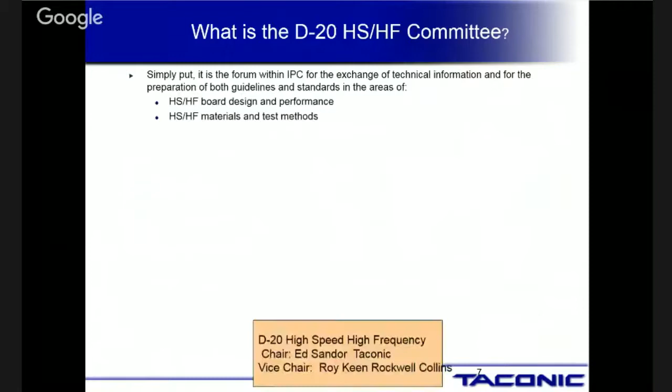And then I also wanted to cover what the IPC is, because it's important. When you're doing your prints and designs, you're always specifying that the board has to be built to IPC 6018. All the drawings have to be to IPC standards. And so the IPC, we write all the standards.

And I'm chairman of the whole high frequency and digital group, which includes all the design guides, material testing, all the bare boards, how you build the boards, all the quality requirements and all the coupons required on the boards, as well as the material specs, and then all the ways to test the boards and test materials.

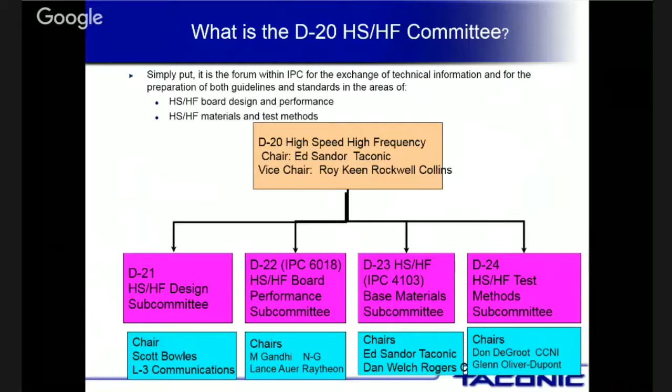And so I have about 13 committees that report to me at IPC, and I'm also on the IPC's Technical Advisory Committee, which dictates the direction of what we're going to do in the industry at the IPC. But you guys use it a lot, whether you know it or not, because it's on every single one of your prints. You probably have 15 notes which specify IPC standards or IPC documents.

So what I did on this is, rather than just talk about what we do at Taconic, I thought I'd maybe try to break down materials. So for example, this says what commercially available resin systems. When you open your computer and there's a printed circuit board in there, what material is being used? Or if you're opening up one of your cabinets, what material is being used on the power amplifier?

And so what I thought I'd do is just give you an idea of all the different materials that are available in the marketplace. I broke them down generically, by electrical properties as well as mechanical properties of those materials. One of the big things that we look for in our industry is the dielectric constant of the material. The dielectric constant really determines how fast the signal is going to propagate on the board, how fast it's going to get from point A to point B. The lower the dielectric constant, the faster the signal will propagate down the trace. So I put these up here: faster signal propagation, lower signal loss.

By picking an impedance that you're going to use on the board, you can determine a 50 ohm line is going to be X mils wide, and you're going to have a nice clean signal. And then by changing the dielectric constant of a board, you can change the size of the board. For example, if you're doing something on FR4, which is epoxy glass, it's got a dielectric constant of about 4.5. Your traces may be probably 25 mils wide. But to get the same electrical performance, you could go to a dielectric constant of 10 and shrink the board down to half the size.

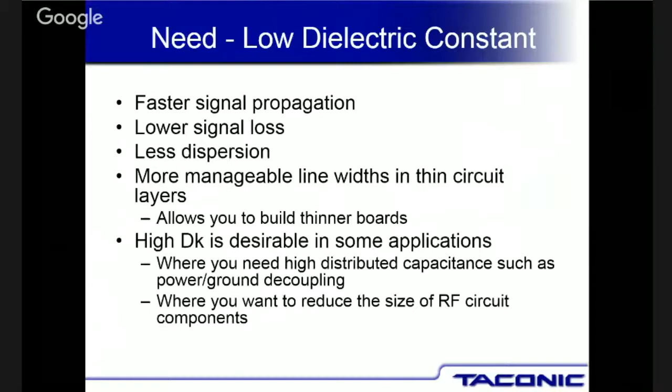And then some people manufacture hydrocarbon ceramics, a completely different resin system, but by sticking different things in there, you get a dielectric constant of 3.4, 3.5, and now people are starting to make higher dielectric constants with the hydrocarbon ceramics. My point is to show that there's a lot of choices an engineer has in picking a material for a particular printed circuit board.

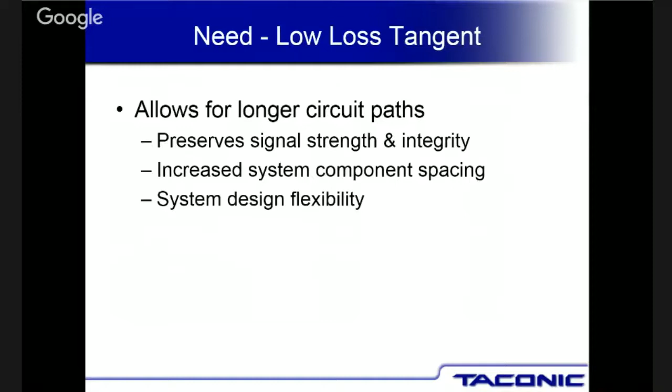And so again, I'll switch over to this and look at these same type of materials. These are ranges, and when you look at the PTFE glass material, it is the best, with a dissipation factor of 0.0009. That means that of the fields going through the material, you're only losing 0.09% of the signal. By the way, where does that go? It generates heat. It's one of the losses that you'll find.

When you start sticking other things into pure Teflon, the losses go up a little bit because you're sticking something else in there. So when you go into a ceramic, the second one down, PTFE ceramic, you can see that the losses go up where you're now losing 0.12% of the fields through the material. Now, if you keep on going, you say, what is FR4? A regular epoxy glass. You go down to the bottom, and there's a couple different grades of FR4, and I'm going to come back to this in a little bit.

But you can look at it and you'll say, damn, 0.025. That means 2.5%, not 0.2, but 2.5% of the fields actually get lost in the material as the signal is going down the trace. So it ends up with a lot of loss, which we all hate in our microwave boards because that contributes to very, very poor board performance. But again, looking at all these different materials, an engineer has a lot of different choices when he's doing a design.

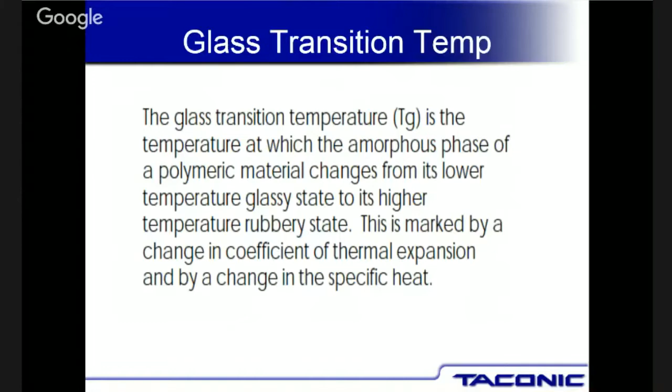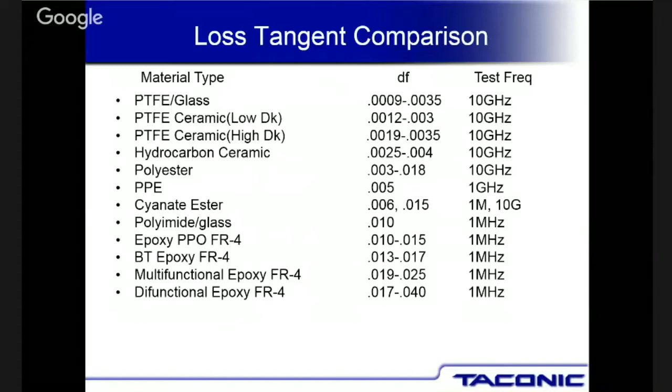So for example, I'll go back to the past slide and say, the bottom two materials, multifunctional epoxy and difunctional epoxy, have different TGs. I'll switch ahead now, and this is glass transition temperatures of different materials.

What does that mean? It used to be you could take that board, put the components on it, run it through an IR reflow, and the board would come out the other end with all the components soldered in place, because you're exposing it to 210 degrees for so many seconds over the IR reflow. With ROHS and lead-free solders, now we're looking at 280 degrees.

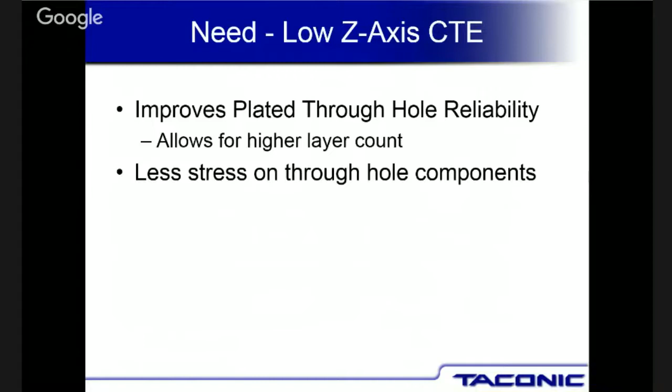With the new lead-free requirements, it's amazing that a lot of people are getting away from the traditional FR4s, the epoxy materials, and a lot of people are going to the BT epoxies, bismaleimide triazines, or a lot more people are going to the polyimide because it will stand up to the lead-free requirements.

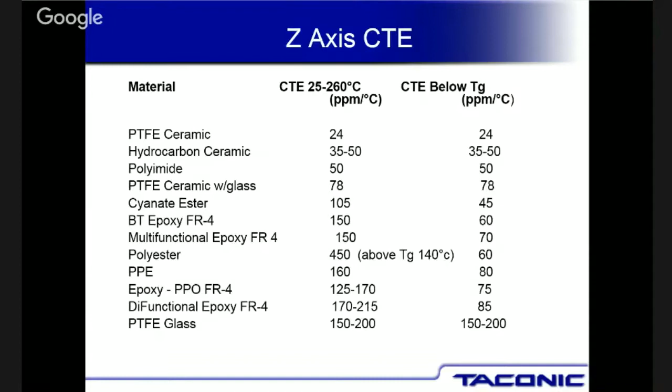Thermal conductivity. What does that give you on a board? Well, the board runs cooler. You get higher packaging density. You can put more components on the board since you can actually run it cooler.

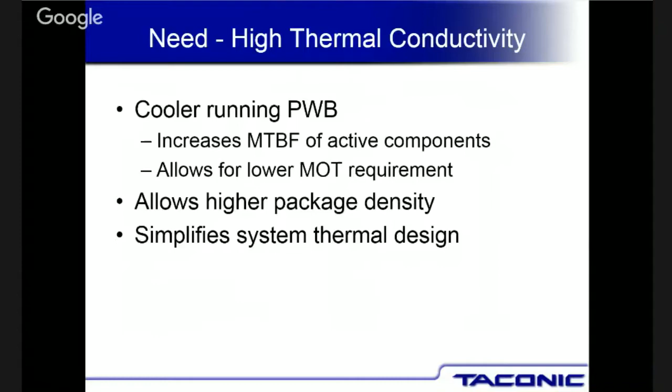The interesting thing about thermal conductivity is that all of these printed circuit board materials, in my opinion, are all insulators, because copper has a thermal conductivity of like 390 watts per meter per degree Kelvin. 390, just remember that number. And then I'm going to flip to the next page and I'll show you our numbers on all of our printed circuit board materials.

So think about 390 watts per meter, and even the Teflon materials, PTFE glass, it's 0.25. So when you really look at it, we're insulating. We're really not doing much thermal conductivity in the printed circuit board materials. But some people find that if you can take the thermal conductivity of this material at 0.27 and raise it up to 1, the board's going to run cooler.

And so we've been doing a lot of work on raising up thermal conductivity, but I still look at it and say, it's still an insulator. 1 watt per meter per degree Kelvin is nothing compared to the actual copper on the board, which is dissipating energy at 390 watts per meter per degree Kelvin.

Moisture and chemical absorption. That's another very important mechanical property of the material. When we make the material, we ship it to a printed circuit board shop, and they're cleaning it with chemistries and water, then putting masks on the board material and etching it, so it's exposed to all different chemistries. Then they're drilling holes through the material and processing it to plate the holes. So all these materials see a tremendous amount of chemistries when they're being manufactured.

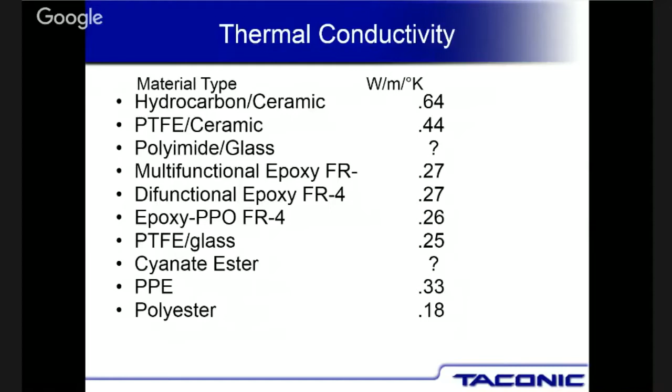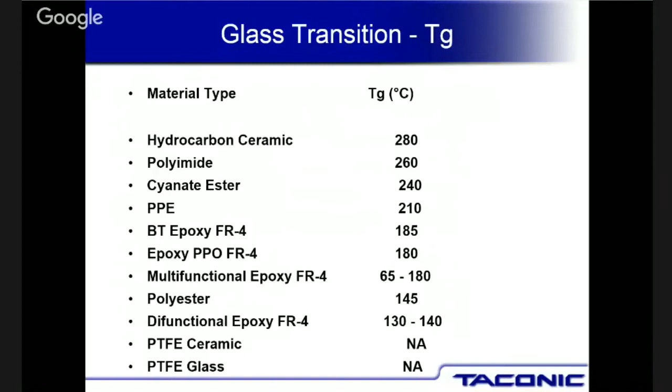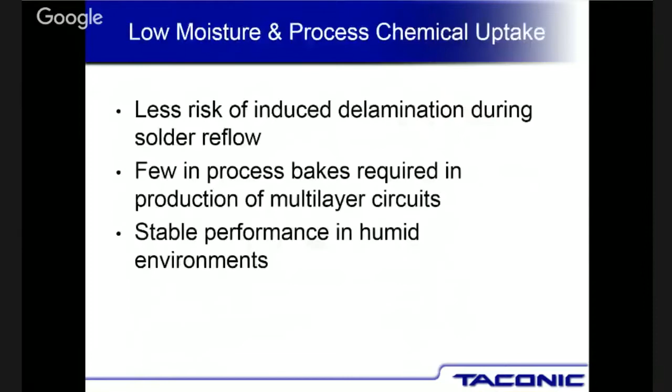Well, right. Well, the polyimide is being used primarily because of the 260. So if I go up here, the polyimide has a Tg of 260. So it means you could take that stuff to a 260-degree lead-free requirement, and it's not going to affect the board material. But then the next question was, let's go down here and say water absorption: on the polyimide glass it's 0.8%. Does that present an issue?

And the answer... We used to make helicopter parts out of polyimide. Okay. And we had to cure them for a month. Yes. We had a month-long cure cycle with different temperatures to get the moisture out and get their properties where we need them. Exactly. And so my comment is, if your board shop knows how to process polyimide glass, the first thing they're going to do is bake that after every operation, because they're going to make sure that there's no residual moisture in it.

Now, the other thing they're going to do is put a solder mask on that board and completely seal that surface, so all that's exposed is going to be the edges and where you have the components. And so they're going to seal it, making sure that no additional moisture gets into the board during storage, packaging, and over the life of the product. I think what I'm putting together is really, really expensive. A lot of time, a lot of process.

Yeah, by the way, I say polyimide. I don't know if you guys are familiar with flexible circuits that are made out of Kapton. I'm thinking you guys at GatesAir don't use any flex circuits, but that's a major problem with flexible circuits as well. It's a polyimide film, and it picks up moisture like you wouldn't believe, and you have to go through all kinds of operations, and so typically you never see a bare polyimide circuit.

By the way, a flex circuit is like, you look at the hinge on your computer, that little circuit board that goes from the control board up to the display, and it flexes and bends. That's a typical flex circuit, and you'll never see it without a solder mask or a conformal coat on it, because it picks up so much moisture that if they had it exposed, I'm not sure exactly how much, but it affects the electrical performance and also the life of the board.

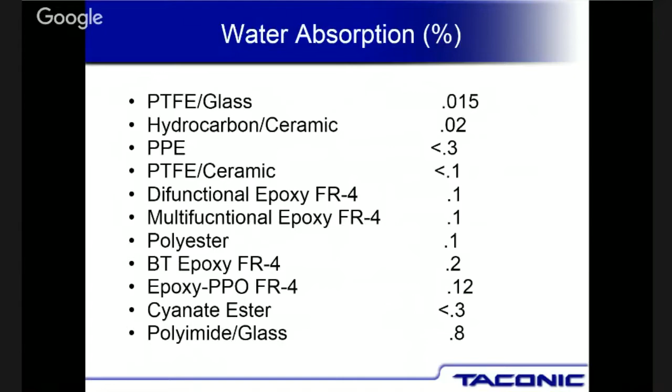Nobody asked questions. So anyway, I was going to go on and say materials that Harris Broadcast or GatesAir has been using, and I think TLX was a very large user. If we go back to all those other charts, they're still using a lot of it, but hopefully on new designs, the newer materials that have been developed over the last 5 years are better. Even though this TLX material was developed back in 1966, it hasn't gone away. We're still selling it after almost 50 years. So it's still very, very large in our industry.

Anything we developed seems to never go away, because once you design it into something, especially if it's military, you can't change it. You can't design it out. So anything we developed back in the 60s, 70s, 80s, 90s, all those materials still exist. The Dielectric 6.15 is something that is also used, although I don't think you guys use a lot of that. Some of it. Right, and that's the next one.

And the reason that you do this, again, as we go up in dielectric constant, the board size shrinks. So if you had a board which was, I'm going to call it 18 by 12, if you did that same board on a DK of 6, you could probably drop it down to maybe half its size. There's a lot of other factors on why you don't do it, but that's one of the advantages of going to a higher DK.

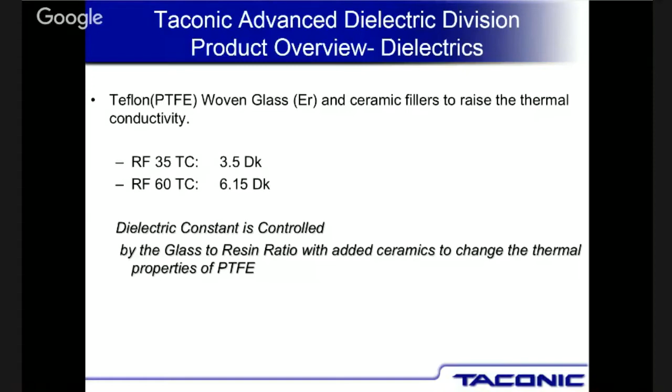So I want to change the subject. You know, there's another thing of, okay, when you're building a power amplifier, what's important? You pick the dielectric material, and you want a material with a very, very low loss, so you are not generating as much heat. Because remember, I said the fields are going through the material, and the loss is generating heat.

So if the board runs cooler, higher thermal conductivity helps. The lower the dissipation factor in the material helps, so that the board will actually run cooler. You can run more power through the board. But also the copper that is used on the board. There's all different types of coppers that are available, from electrodeposited copper, rolled copper, and by the way, I think I even put in some things here on how all those different coppers are made, and so we could go over that.

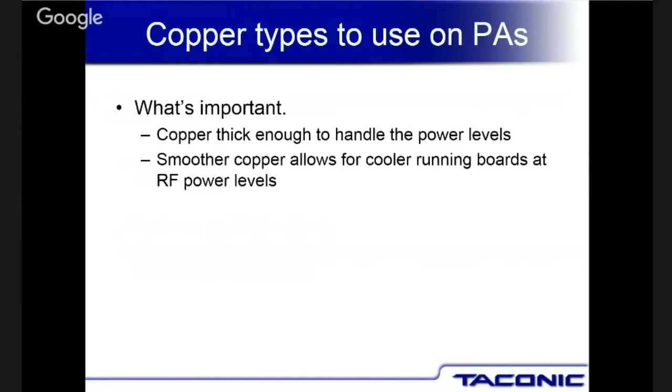But one of the things that I note when I look at broadcast equipment, you want thick copper to handle the high power, but at the same time, you want smooth copper to get higher RF energy. So the second line here, smoother copper allows for a cooler running board. This is an interesting issue, when you look at how copper is manufactured. Let me do this. I'm going to talk about how copper is made, and then we'll come back to what you guys are using and what you guys are doing.

There's a material called rolled copper, and that's typically the copper that's used on flex circuits. How they manufacture it, they take a copper billet and they draw it down between large rollers. And as you roll it down, just like when you're making cookies with a rolling pin, the dough spreads out. In this situation, the copper spreads out to an 18-inch wide, 24-inch wide sheet, and then the copper is reeled up on a roll at the end. The surface roughness in that copper is basically the roughness of those last two little rollers that it hits.

And also, because it's a rolling process, the grain direction tends to be parallel to the panel. So that means it's really good for those hinges on a printed circuit board on your computer. It's very ductile. It'll be very, very compliant and bendable. By the way, we get this copper in a roll, and we actually take it and sheet it. So we cut it into sheets and we put it on the material that you're buying.

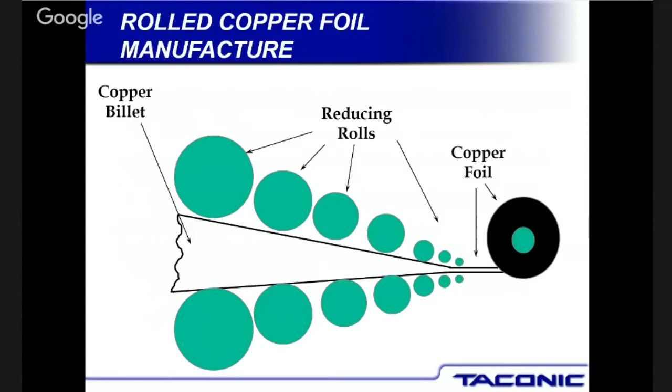Electrodeposited copper is how they're manufacturing at the mill. They actually have a very, very large stainless steel drum, and what they're doing is bombarding that drum with copper. So there's two sides of the copper. There's the smooth side, which is right against the drum. Then there's the outer side, which, I call it, looks like the Himalayan mountains, because it's really very large peaks and valleys in the copper. And again, they roll it up, they ship the roll to us, we take it and sheet it.

And traditionally, there's only been two coppers that are available, rolled or standard electrodeposited. And with ED copper, the grain structure is perpendicular to the panel. So it's not good for dynamic bending. You can't crease it a lot, it'll crack.

In our situation with the Teflon, we're taking our Teflon materials up to about 900 degrees Fahrenheit, melting the Teflon, and under very high pressure, melting the Teflon into the copper surface. So we're relying on this tooth in a lot of ways to make sure that we get good adhesion.

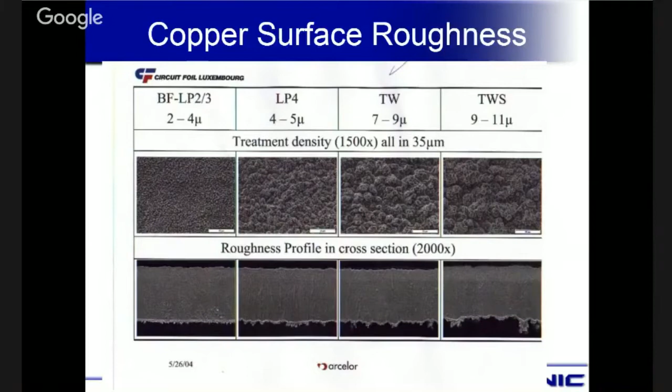And so, in fact, what we're doing a lot is we're supplying a lot of, I call it reverse treated copper. When I was showing that picture, I'll switch back here to the drum. There's two sides of the drum, and everybody relies on the tooth of the copper to make it stick. What we've been doing now for a number of years is we're actually laminating the smooth side of the copper to our material. And so we're putting the tooth up.

And so it's a little tricky because it does affect bond strength, but we've worked through that, and I think our expertise is we figured out how to get really smooth copper to stick to our materials. But what it also does, and I'll switch this one. I call this one here on the right-hand side, it says standard foil.

When you're etching standard foil, this is the tooth on the top. You can see where it says C stage. There's the tooth, and you're etching it from this direction. And this is the drum side. And the drum side, it's like a skin, is the best way to put it. And so when they're etching through that skin, it doesn't etch uniformly. And so what you end up having is a trace that doesn't look rectangular. It basically looks like a trapezoid or like an hourglass.

But with the reverse treated foils, again, they're smoother. And what we're doing is we're putting the smooth side against our material. And now when you're etching, you're actually etching through the tooth. And so I look at it and say, it's like calving a glacier. The etching chemistries get right down through the cracks and crevices in the material, and it actually etches away like calving a glacier. It actually shears off very straight.

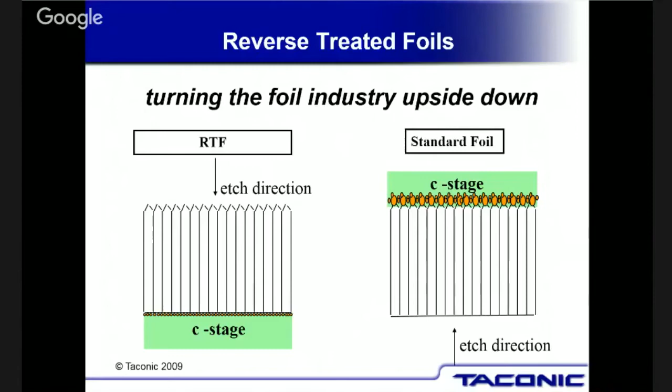And so one of the things about microwave is that we're always concerned with coupling from one trace. By the way, you guys have seen microwave boards. When you look at a regular digital board, you can look at point A and point B, and you can follow the trace. It goes all the way across the board. On a microwave board, none of the traces go anyplace. They go halfway across the board, and then there's a gap, and then it couples to another trace, and then it couples to another. There's no continuity.

And so you're always concerned with how far this trace is from that trace, because the energy is jumping from one trace to another. So there's not electrical continuity, but it's microwave continuity. And so I always ask people, when you're doing a microwave board, what's the distance between that trace and this trace? And so how do you measure that?

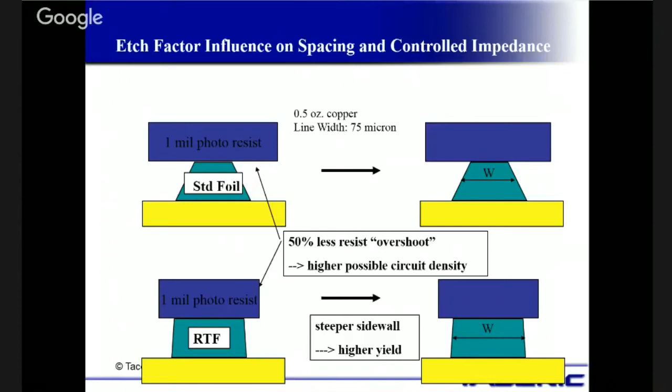And it's very, very difficult, because you measure the foot, you measure the top, but it affects the coupling on a board. Whereas the reverse treated foils, which are smoother, etch very, very straight sidewalls. And to me, it's a lot easier to figure out this distance, and it's always consistent. Whereas this always changes, because it depends on how much time it takes to etch through that skin when you're etching the boards.

So anyway, I have a lot of different things here, but I'm going to open up the questions if anybody has any questions. And like I say, I can talk for 10 hours. They'd have to bring in dinner.

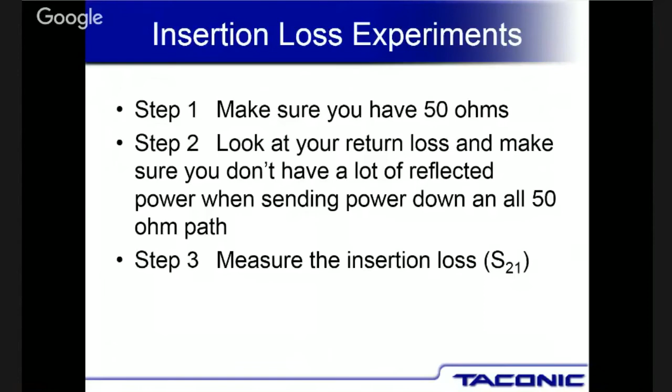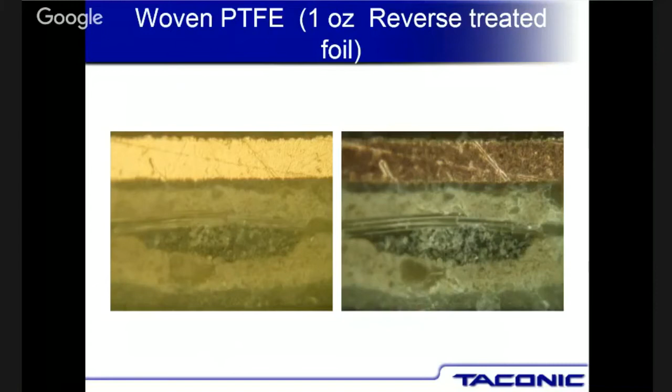What we're doing now is this is a newer material, this is copper foil. And again, this is a glass bundle coming straight at you and a glass sleeve. But these are now the newer coppers being developed that we're now shipping to customers. And this is HVLP, hyper very low profile copper, because somebody in the copper industry couldn't figure out what else to call it. And you can see this is at 500 magnification, and the tooth is getting much, much smaller.

And so these are the new things that the industry is developing for the marketplace as signal speeds get faster and faster, and people need smoother coppers.

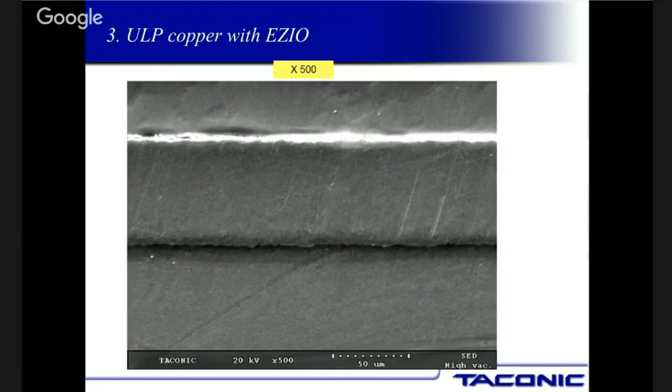Which one of your materials has the similar CTE to copper, or closest? The reason I'm going to say it's a loaded question is because the CTE matters typically on high modulus materials that are stiff. You should always ask that on an FR4 material, because FR4, once it's cured, is a thermoset material system, and the modulus never changes. It remains a stiff material. When you look at Teflon material, I don't know if I have it on here. Nope, I don't have it on here.

Our material is a thermoplastic, which means that as you heat it up, it gets softer. And so the amount of stress in a plated through hole is significantly reduced, because the modulus of our material at room temperature versus IR reflow temperatures is like 1/100th of the value. It drops significantly. So our material softens, and the copper in the hole actually drives the reliability of that hole. Where on FR4, the stress goes right to the copper because the material is so stiff, and it actually takes the copper and stretches it, where our material will conform to what the copper's doing.

So there are companies that actually hire thermomechanical analysis engineers to figure out what the board and the holes are going to do when you put all these different materials together in a large phased array radar subjected to high temperatures and environment. Our newer materials that are high ceramic filled typically have lower CTEs. Copper's is 16.7, and very few materials have the exact same. But it's not a really big issue, in my opinion, on thermoplastic materials. That's why I say it's a loaded question, because we don't worry about that on our materials.